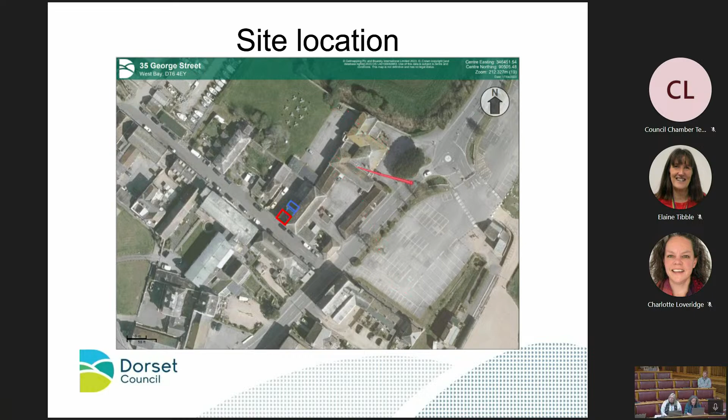This shows the aerial view of the site. It is a Grade 2 listed building. There's the Grade 2 listed Slader's Yard just on the other side of the road. There's Station Yard car park just to the east, and Haddon House Hotel just to the north, which is also a Grade 2 listed building.

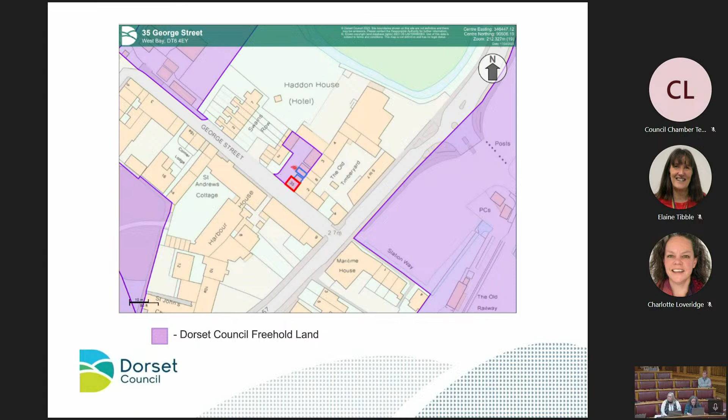The land is Dorset Council freehold land, hence it coming to committee for consideration in line with the Constitution. The plan shows the purple shaded areas which are Dorset Council land, and the application site is within that land.

There's been various uses of the site since the early 1990s, for such things as kitchen studio, electronics and A1 retail. The current application is to retain the existing mixed use as a shop, off-licence and bar, which commenced 1st of February 2021.

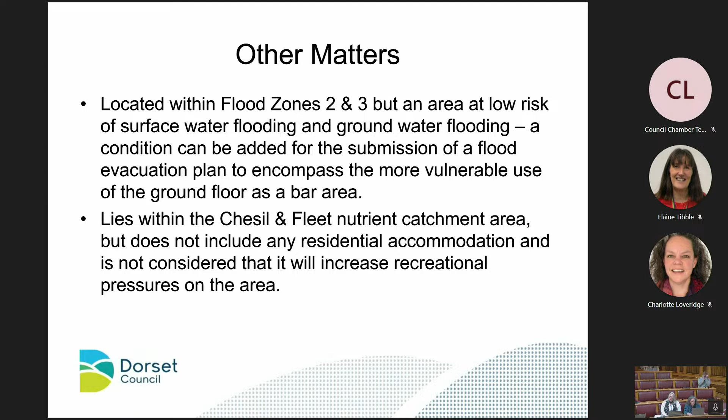Therefore, the recommendation is that having regard to the fact the application is just for a change of use only, there will be no harm to the designated heritage assets, and the setting in the conservation area will be preserved, as will the wider natural beauty of the Dorset AONB.

The proposal will not create any significant harm to neighbouring residential amenity and highway safety, and is in accordance with policies of the local plan, neighbourhood plan and NPPF. Therefore, the recommendation is that the committee be minded to grant consent subject to conditions.

The recommended conditions would be for approved plans, a restriction for the building not to be used as a bar other than between the hours of 12 midday and 11pm at night, for no live music to be played and no amplified music to be audible at nearby residential dwellings, and for the submission of a flood evacuation plan within 1 month of the decision.

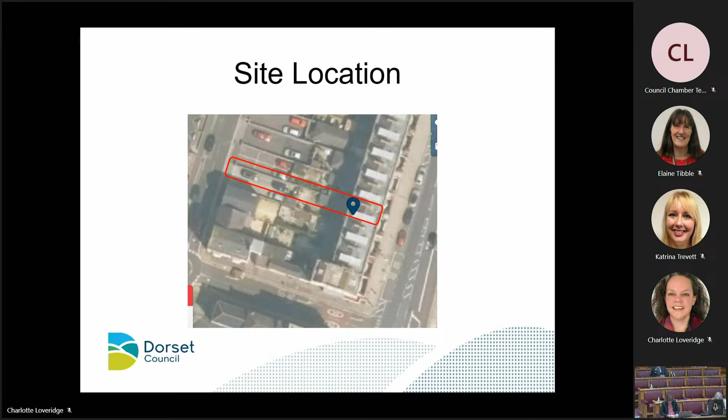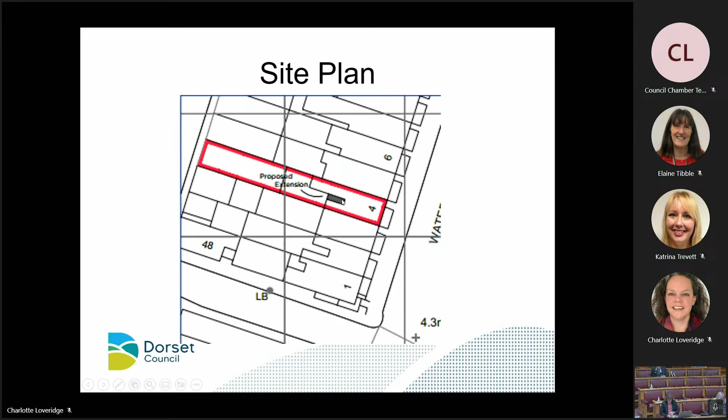External access is to remain, for fire safety purposes - it serves as the fire exit, given it's the only rear exit onto the rear courtyard garden area behind the property. So that's to be retained.

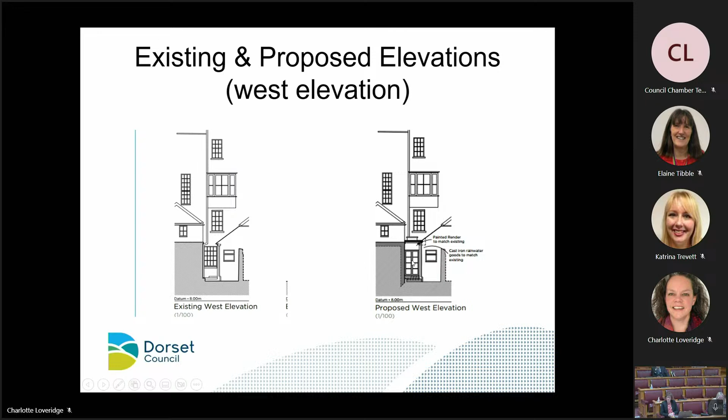This is the existing and proposed elevations plan looking on the west elevation. You can see a flat GRP roof to be extended over that service walkway area, and then a new timber external door put in once extended.

The key considerations are impact and harm, although in this instance we consider there is no harm to the Weymouth Town Centre Conservation Area, the actual listed building, the impact on the setting of the rest of that terrace, which is Grade 2-star listed, and other non-designated and designated heritage assets that neighbour the property. We consider no harm is raised, and that the conservation area is preserved.

In terms of neighbouring amenity, under the full application, given it's a very small infill extension, there is no wider impact to neighbouring amenity, and that's considered to be acceptable.

Therefore, we're concluding no objections raised. The proposed development poses no harm to those heritage assets, both designated and non-designated. There are no concerns in regards to neighbouring amenity, and therefore we're looking for the committee to grant planning permission and listed building consent for the reasons I've already indicated.

In terms of conditions, on both applications we're seeking the 3-year time limit, plans list, external door details to be submitted and agreed, roof light details to be submitted and agreed, construction details of the roof, and new rainwater goods to be cast iron painted black, to preserve the special interests of the heritage asset. Thank you, Chair.

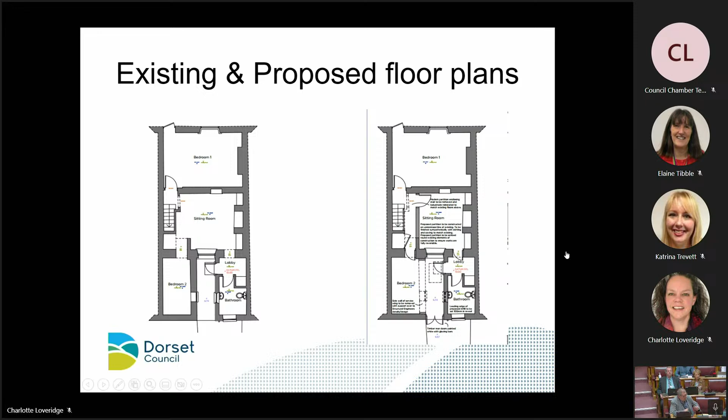Okay, Councillor Kimber. Thank you, Chair. When you made the presentation, you showed us the buildings that are listed within the vicinity. I take a great interest in this area because I know when I first started many years ago in planning, I think we nearly bankrupted the council at the time over Brunswick Terrace.

Can you tell me a little bit more about the listing? I would have thought almost every building along there had that Grade 2 listing. I just wondered if you could explain that part. You gave a diagram of one with the red dots, just to refresh. I just wondered why it wasn't more buildings, or it was...

I'm sorry to make the point, but that doesn't really relate to the application we're dealing with, in terms of considering the impact to that direct listed building and the terrace. The case officer, Toby, actually considered this application. I can show you the plan with the dots on. However... that's weird, sorry, bear with me a moment. Technology not going my way today.

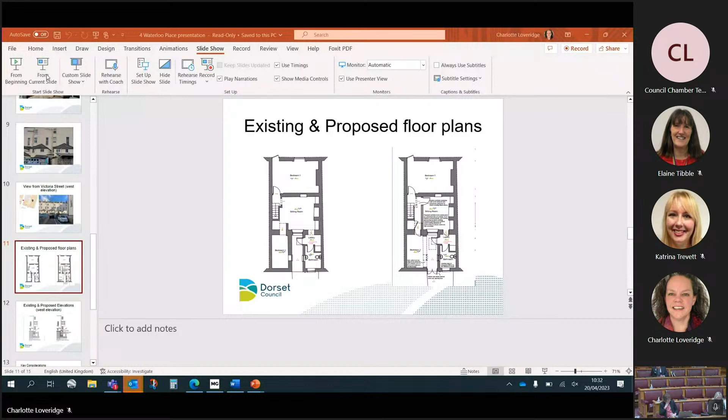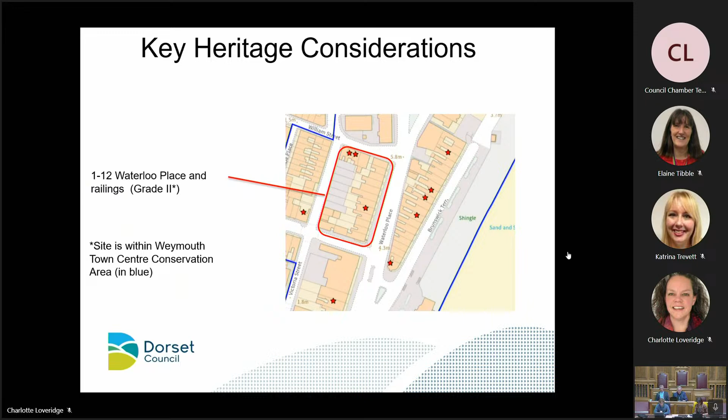Does that satisfy your question, Councillor Kimber? Yes, that's fine. Okay, just a quick question. I noticed in your report that Historic England should seek the view of a specialist conservation advisor. Has that been done? Yes, we've sought the advice of the local conservation team, which is what their advice relates to, and no objections have been raised.

Okay, well in that case I open the debate to members. Anyone wishing to speak? Councillor O'Leary, you're up first. Yeah, Chairman, I see no objection or reasonable ground for objection to this, so I'd like to propose that we accept this recommendation. I'm happy to propose both of those. Thank you for that, we've got a proposal on the floor. Is there a seconder? Seconder, Councillor Cocking, Chairman.

Councillor Cocking, do you wish to speak? No, Chair, just happy to second this motion. Okay, before you go on, do you want to take Councillor Weller and Kimber before we go to the vote? Are you wishing to speak, Councillor? No. Councillor Kimber, do you wish to speak at all? Right, okay, that's your lot. Partly that's my lot, okay.

Fair enough. If there's no more deliberation, members are content that they have heard the entire presentation and debate. I will take a vote by show of hands on application number PFUL 2022-05320 only. All those in favour? That's unanimous, thank you very much indeed.